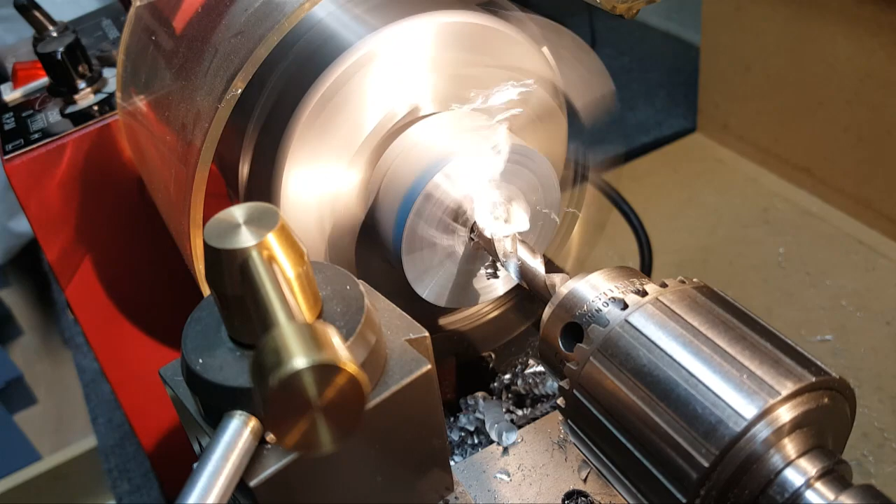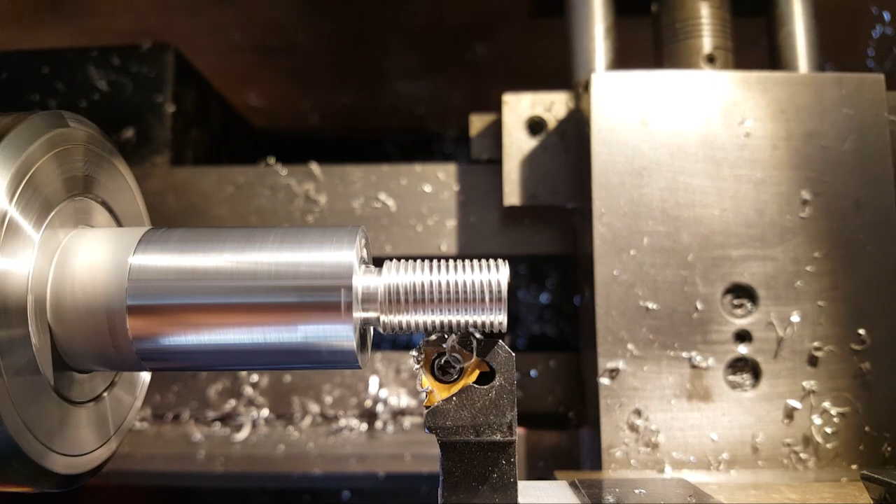I don't know what happened, but all the channels I subscribe to, the few that I subscribe to, seem like pre-July 4th nobody did anything. They were preoccupied with something. And even post-July 4th there's still no videos being produced from the channels I subscribe to. So I'm no better, I haven't done anything for 3 or 4 weeks now myself. So I decided to just do this video and share what I've been doing over the past 3 or 4 weeks.

One of the things is I've been collecting parts. I'm going to seriously enlarge the 3018, so that'll be fun. I did find a double start 500mm lead screw, and today I'm supposed to get the aluminum frame stuff, 500mm.

So what is this going to be? I guess Dave's shop talk. You know, if Tom can have a shop talk... no, Stefan does the shop talk. Okay.

So I'm just showing basically what I've been doing here, a little bit of it. And actually, if you look behind me, Suncoast Precision Tools sent me this big wall poster. I'm thinking, great, I've got no empty wall space here in the shop for it. But then I realized, perfect, steel door, put it up with magnets, it's perfect.

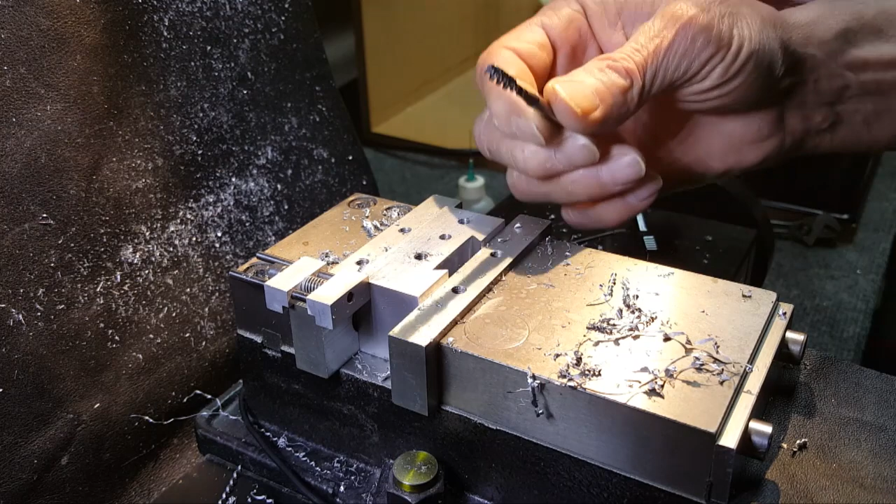Just had to record this. These are the YG1 taps I was talking about from Amazon, and I'm using Tap Magic for aluminum. But normally with a tap I have to go in, come out, go in, come out to clear the chips. These holes are a 1/2 inch deep, and I'm going to go in until I just hit bottom. There's very little force that has to be used to do this.

I know my hand's going to be swinging right in front of the camera, but it just goes in and the chips just come right out. I'm not sure how deep I am yet. Let me lower this a little bit. It just goes in. This saves me a lot of time, I cannot tell you.

There, just bottomed out, so that's a full 1/2 inch deep tap. Ow, whacked it. And they just come out in one long thread, boy. So I highly recommend these guys. I also used to have to use the taper tap first and then a bottom tap. You saw this is a bottom tap, and this is a real bottom tap. It is square to the very end, goes all the way down, and I can start the tap with it.

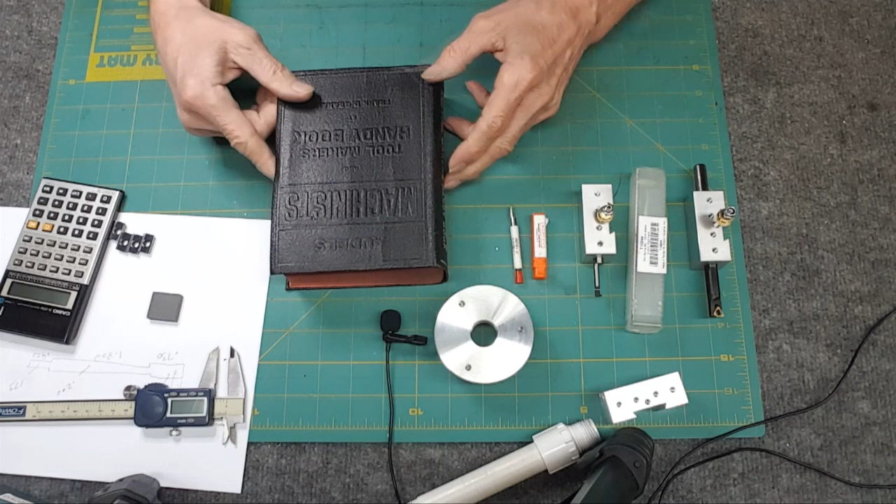First up, I'm not sure, I can't remember how I got turned on to this book, but I remember looking at it on Amazon and it was bloody expensive. There's the title of it. So I went on eBay and found this one, great condition, $40, free shipping. It was from some bookstore I guess on eBay, published in 1946.

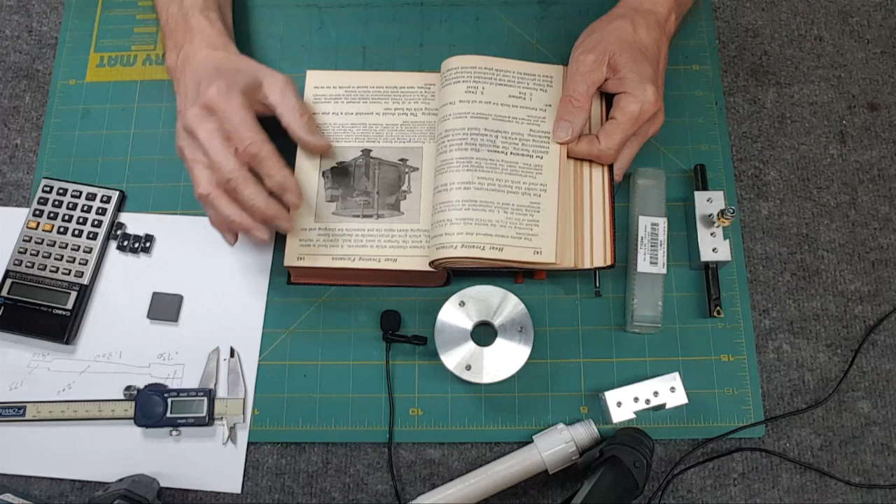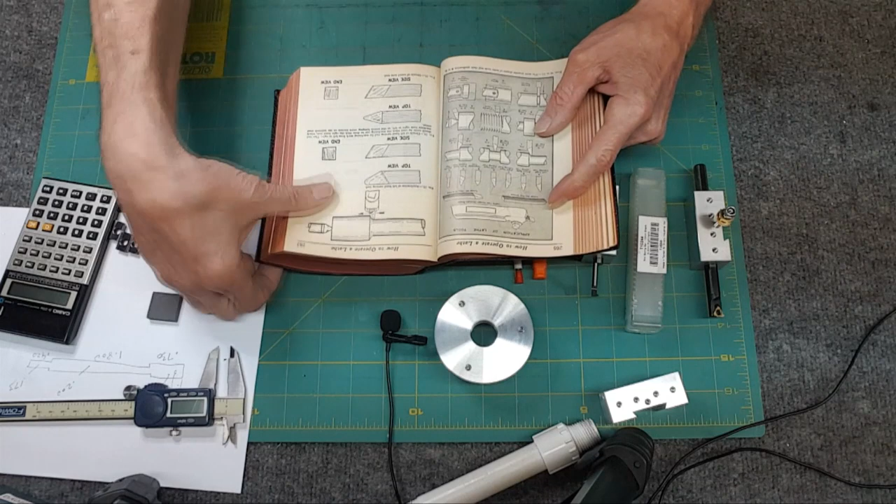But I'm not that terribly impressed with it. I did go through a lot of the pages and stuff, and a lot of it's more history for me, you know, how things were done back in 1946. They don't have a whole lot... I was hoping for ideas on projects and making tools and things, and it's not in there. It's more how to do things, cutters, how you do it on a lathe operation, and so on. Oh, that's the first time I saw a 5C collet in here.

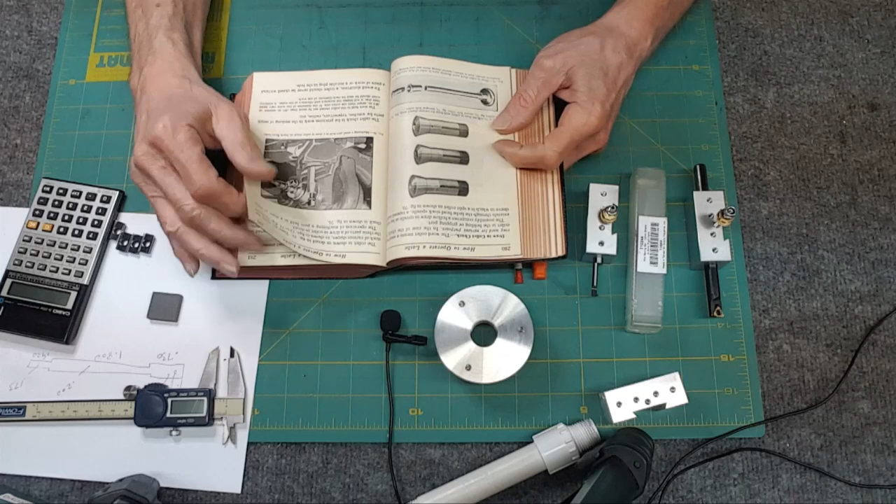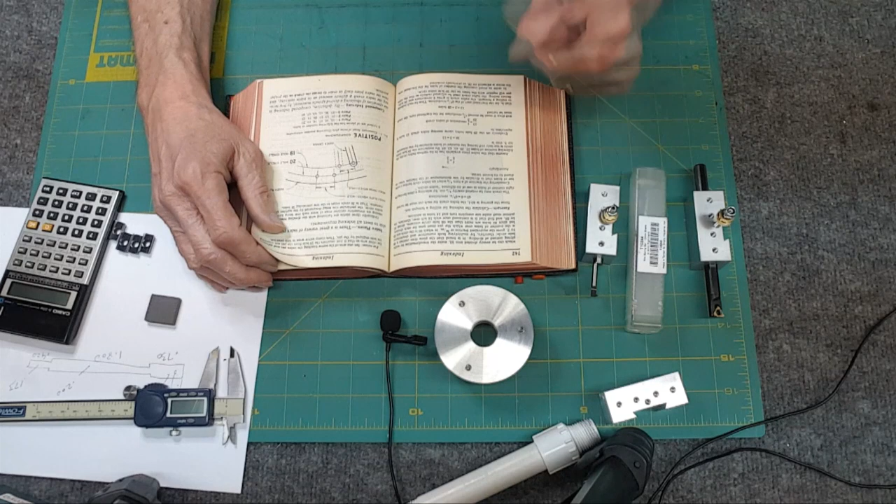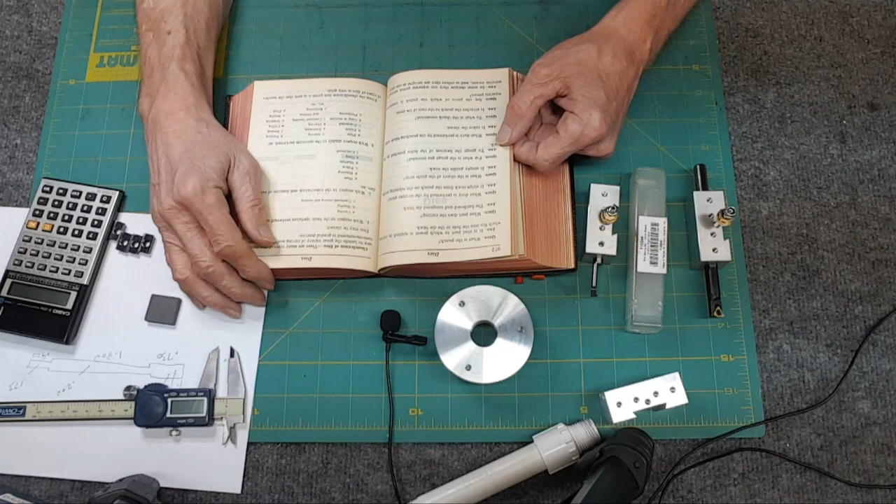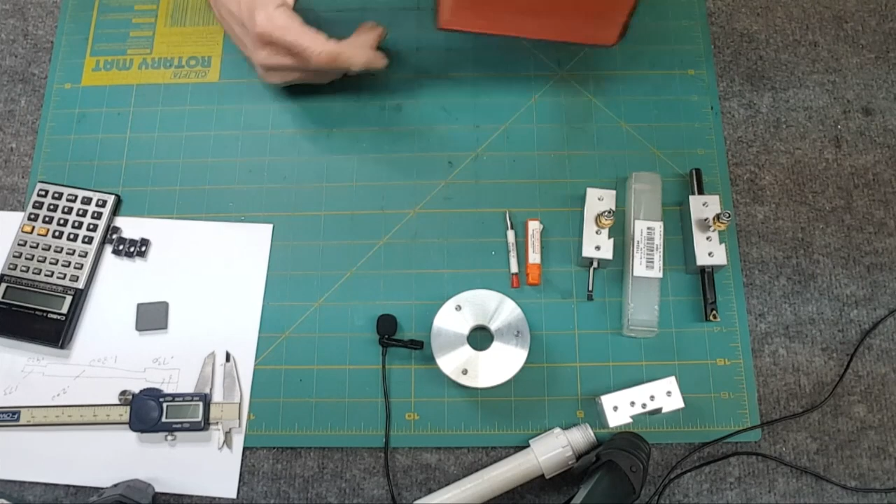I'd say that other machinist book is far more informative and useful, which I showed in a previous video. They do have question and answer sections though, which is kind of interesting, like a class book. Whoever did this, this is a lot of work to type all this stuff up. Different sections, the index is kind of weird on it. That's the first thing I wanted to share if anybody's interested in going after that.

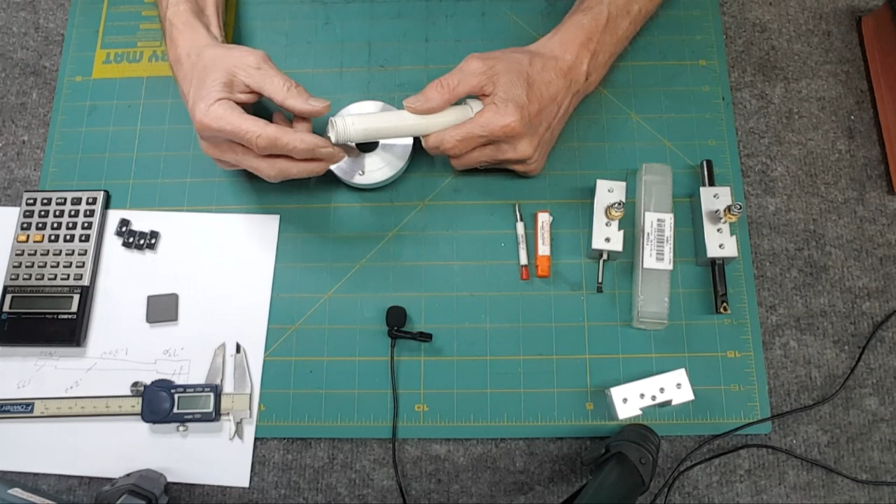Next thing, I'm trying to make a holder, a mount for a camera, and you cannot hold it on the mini lathe any which way. That's a 1/2 inch, 14 thread. Couldn't do it. I've got giant wrenches, it's slipping in the four-jaw. I tried to put it in the bench vise, no way. I couldn't even thread plastic. I had a monkey wrench on the threading die and it just kept spinning. It's ridiculous. So it kind of goes together, but I figured I don't have any internal threading tools.

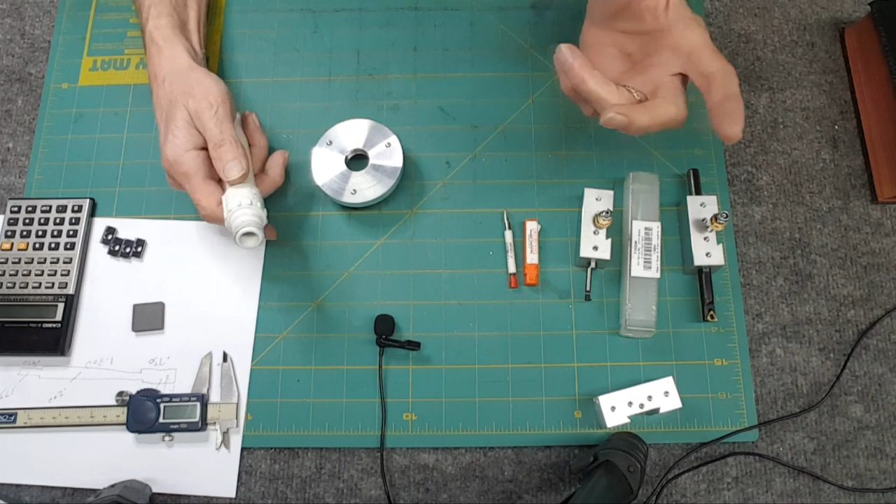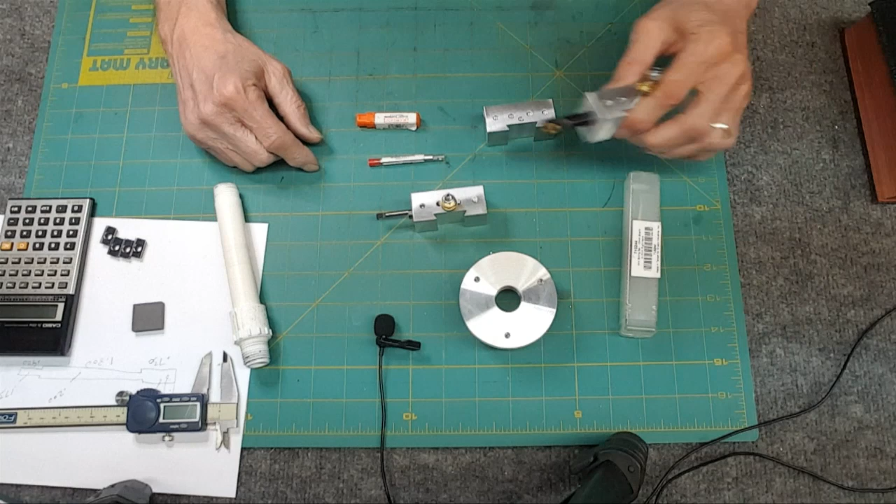So I went on eBay and found two Micro 100s. This is one of them. But I'm tired of breaking down a tool to put a new one in, redoing the height, then having to put it back together when you're done. So I started making a batch of three, which makes things really easy - you have the vise stop, put it in there, face mill, put the next one in, face mill. All of these turn out exactly the same and it's really easy.

With the DRO set up, you just cut to depth, move over, cut to depth, and so on. One of them I was going to dedicate to this, the other two were going to be something different, but I blew it on this thing because I kept banging them out and put all the holes in the center, which you can't do if you're going to put a regular cutting tool in it. I started, then realized, oh man, I blew it.

So this one's scrap, no fun. This one's done - I need to get the right size screws to finish it off though. So I have a good one, and this guy actually goes to the 14 threads per inch depth. I did have an outside one too, so I went over this again with the threading tool, doing the passes, and got it down to spec. Actually, I think I took it down further so it would sort of go in there, but now I've got the tool to do that with.

I haven't done it yet - completely forgot I had this tool in the drawer. So I wound up making this one, since I had all the holes on center, for this guy. But the curious thing is the angle - I don't know if you guys can see it, but this is the flat, and this guy is angled that way.

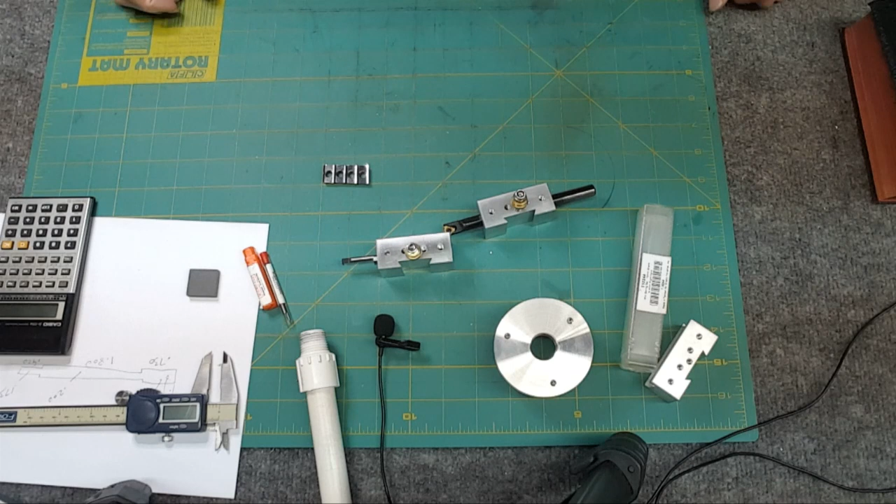So one other last curious thing, $2, eBay. It was listed as a deburring stone, for a couple bucks with free shipping. It's meant for skis, I'm guessing snow skis. So I picked it up and played with it on a few things, and I don't know how you're gonna deburr a big snow ski with this thing, but I don't know. I thought I tried it on something, but I can't remember. So that was just one other thing. If anybody wants to mess around with a teeny little deburr thing, next time I do steel or something I'll probably try it. But I always use just a regular sharpening stone.

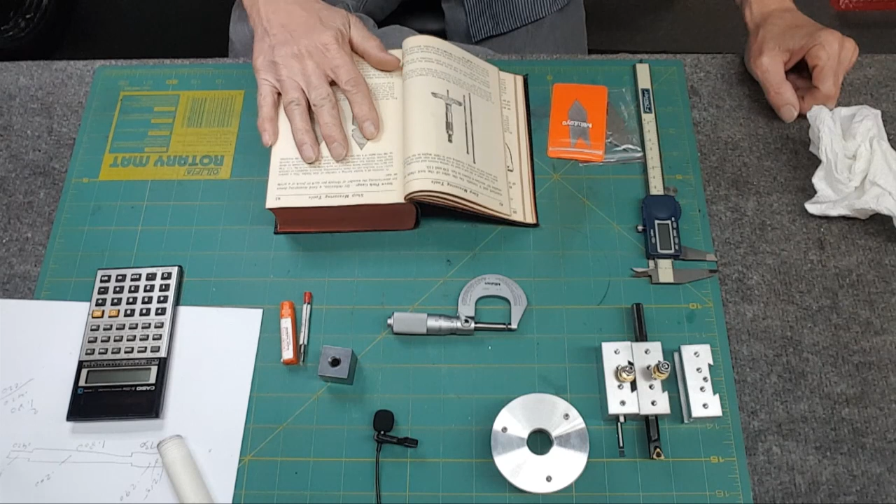So I think that's it. All I've been doing here since I did the last video weeks and weeks and weeks ago. I am finding some stuff in this book interesting. Just thumbing through it, I don't know what page it was on now, but it started making me go back to the beginning and actually start reading it from cover to cover.

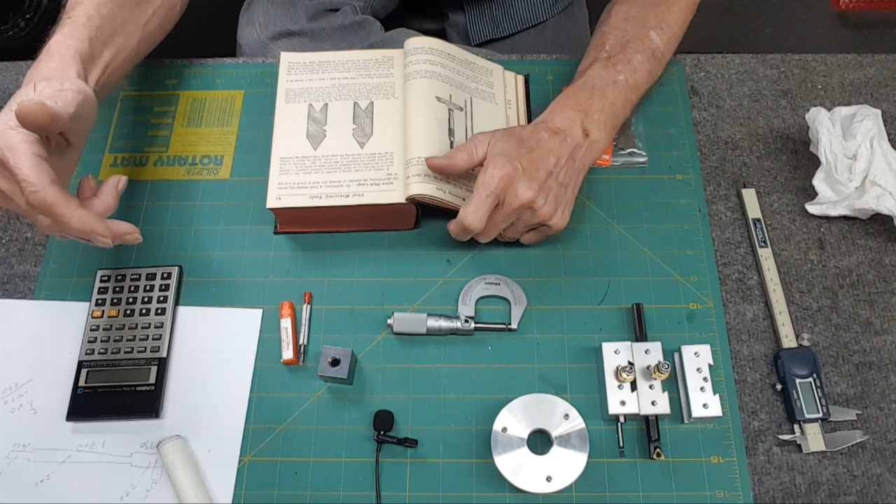Someplace back in here, they showed a precision square for a granite surface plate. It was shaped like that. It had indents in it for the fingers, so you didn't touch the edges because they were precision. I think it was a Brown and Sharpe 559 or something like that. I went on eBay just for grins and giggles, and yeah, $300, $400 for them, old, used, pre-owned, and the edges do not look too good to me when you hover over and zoom in.

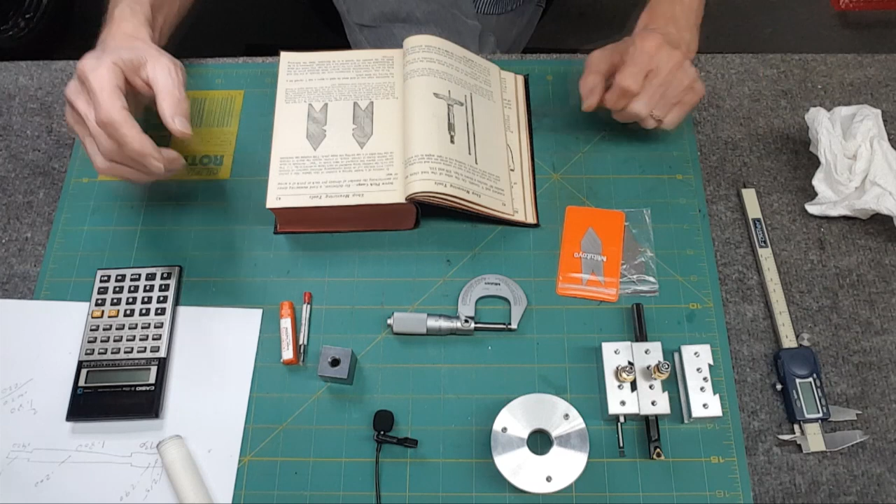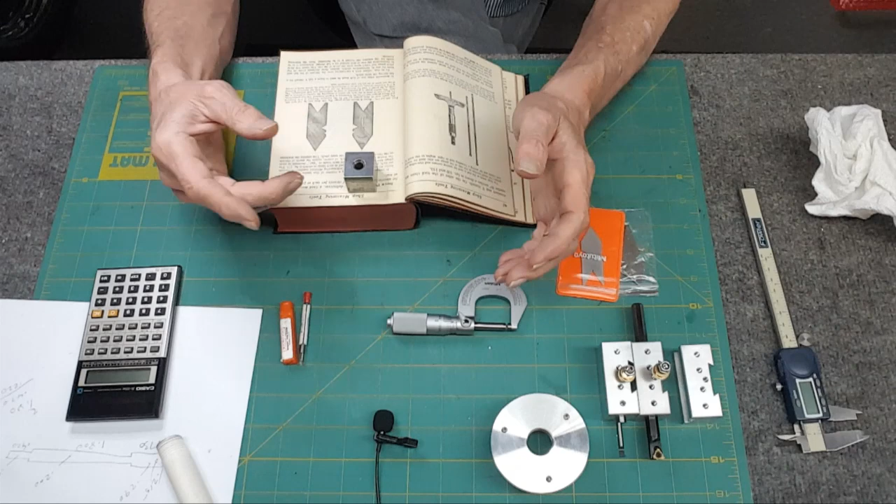For those of you who watched a previous video where I was checking all of the other squares from my square set, they're perfection. That is a perfect surface plate square, whatever thing. They sell these on Amazon. You can get a 3-inch, 4-inch, $10, $20. So I realized, I've got a whole set of precision absolute square stuff.

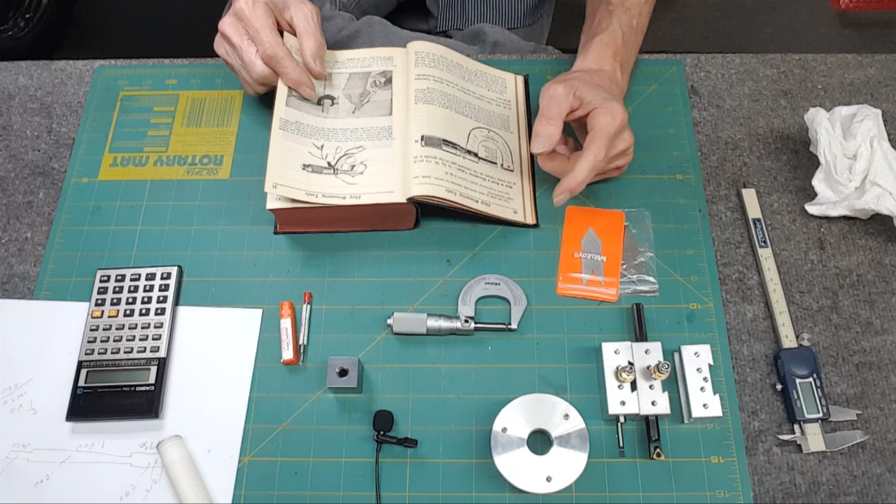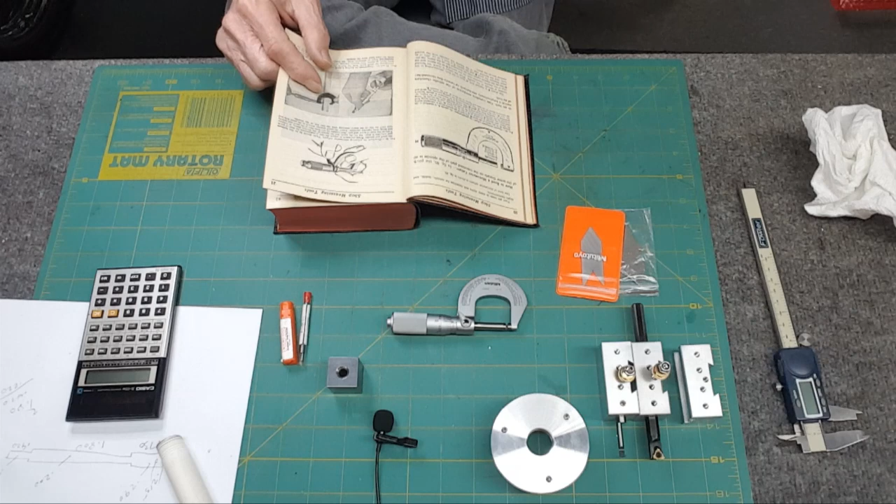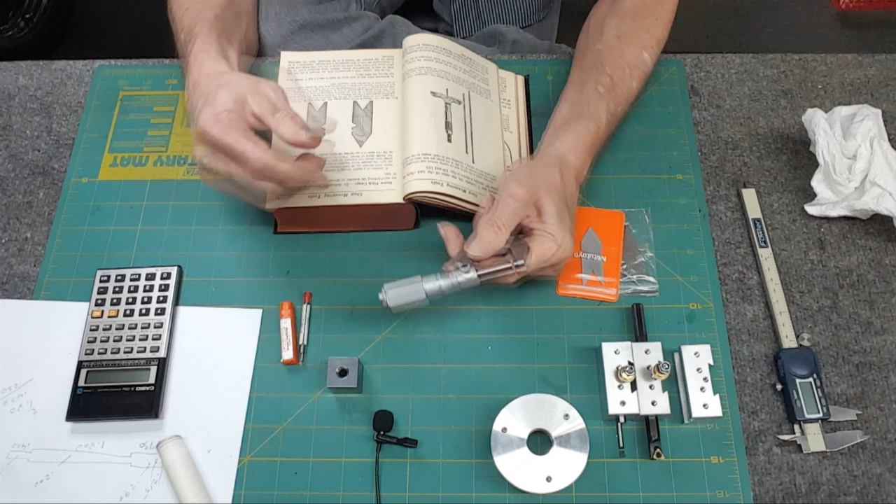The other thing was back in here. Yeah, they do call it a micrometer caliper, technically. So everybody's shortened it and they call it a micrometer or a mic. But the other machining fundamentals book also, I learned, it's called a micrometer caliper. But they talk about the hole, and I was always thinking the little calibration hole here, that yeah, you spin it on a friction fit for the first time to calibrate it. They're saying no, it's to compensate for wear in the nut and the lead screw. So if you have a very old mic, you may want to double check its calibration.

Mine, yeah, when you buy something this expensive and it's supposed to measure tenths, mine is zero, lands right on the money. So I thought that was interesting to learn, that these things wear out. I mean, really?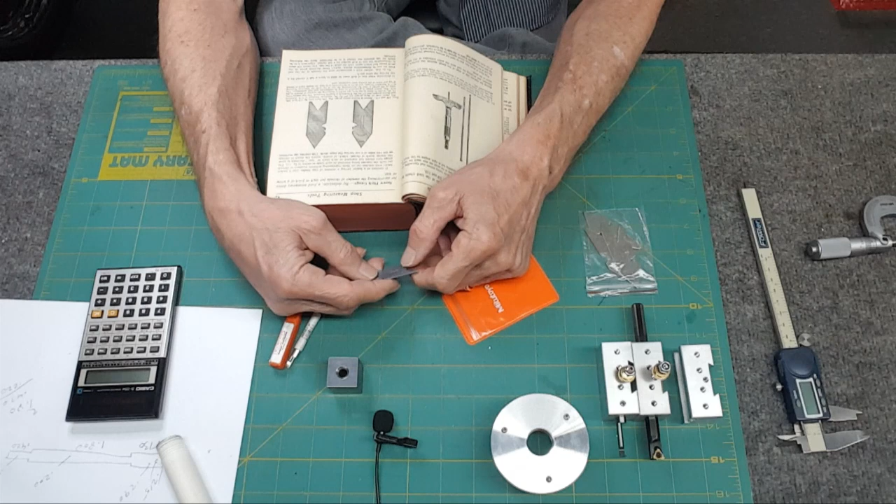32, 24, 14, and 20 threads per inch. So you can actually hold this - this is a 12, and when I held it up, it lines right up. So it's not only for making your tools, you can kind of use this as a cheap thread gauge, a quick one, rather than buying the thread gauge set.

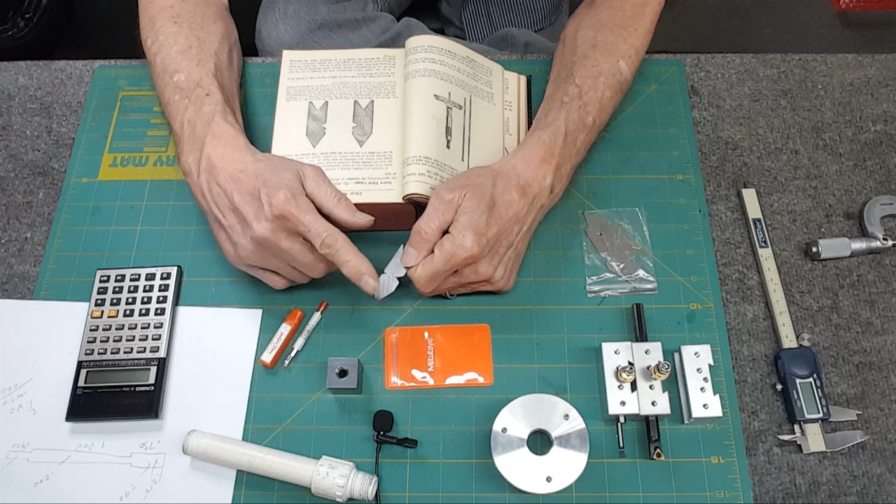But the thread gauge set gives you every one that there is. The real interesting thing is the table on this. They don't go very far though - I think it was like 28 threads per inch is the highest they go. I need to find a table that goes all the way up.

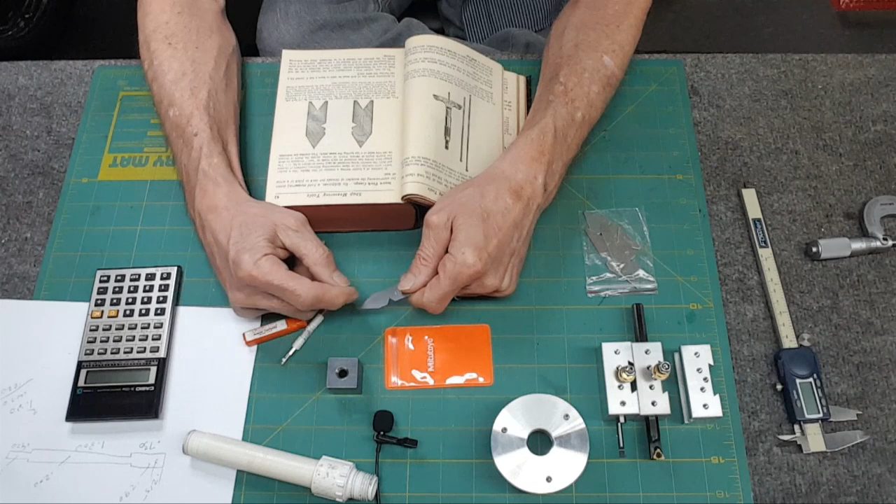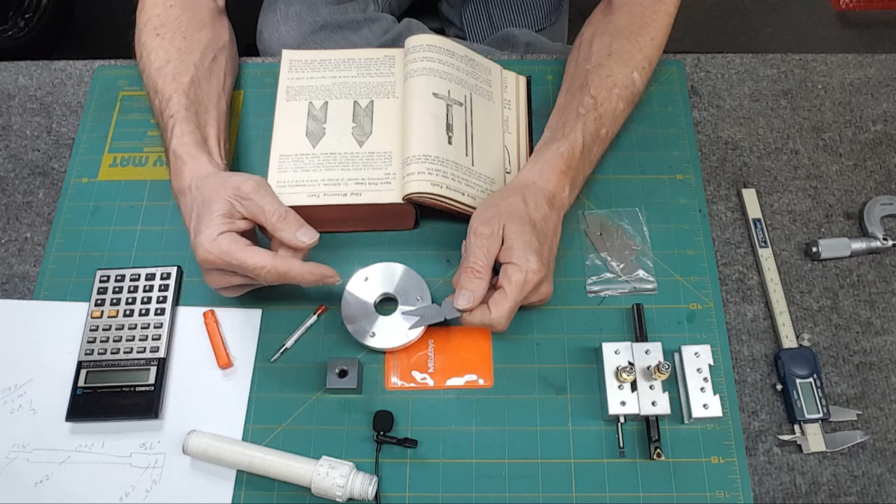These numbers are, for instance, if you wanted to do 12 threads per inch, there's a double depth number here. What that means by double depth is the depth of this side plus the depth of this side. So if you want a perfect V thread, you take the diameter - like if we're going to do a 3/8, you take 3/8 minus the double depth. That's the drill bit you use to get a perfect V. I did check it on a 3/8 24, and sure enough, what they recommend is oversized by quite a few thousandths.

Like I said, I want to find a table that goes up to like 32, because I got 632, 832, 1032s, and I'm doing that a lot. When you put the screw in there, it's kind of sloppy and rocks. So it'd be fun to actually drill a hole and tap it where I'm going to get a full thread and see what it's like.

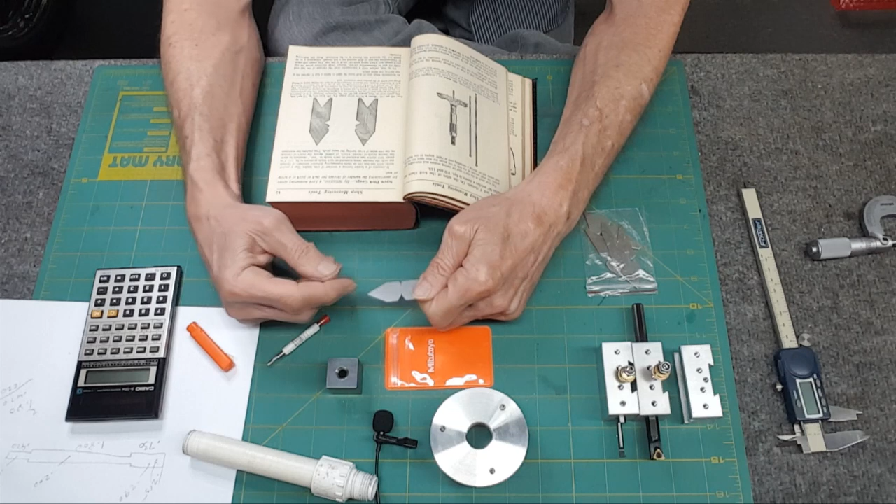Because with it oversized, you're missing the peak of the V - you're drilling the hole bigger, so you're getting the depth but you're missing the point on it. I should look at some thread. All the threads I remember looking at seem like they always have a point to them. So I don't know - I'm going to just keep going through this book because this is interesting to pick up some of this stuff.

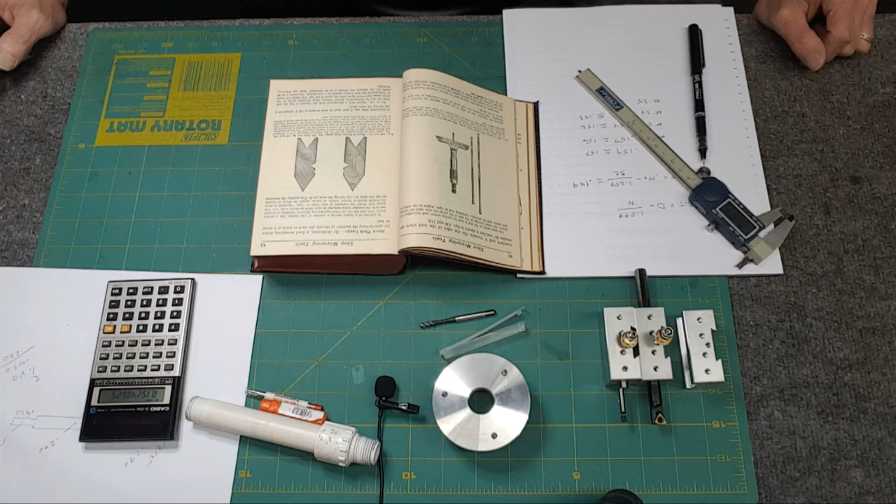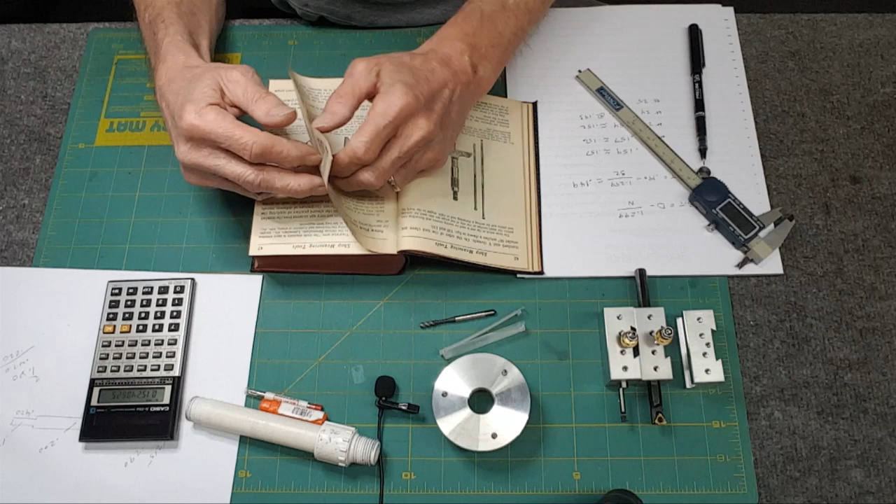I'm saying, you know, I got to find the chart for all of these. You turn the page... oh come on, alright there we go. Jeez, these are thin pages. There, finally - there's the formula. I guess I'll turn it over so you guys can see it.

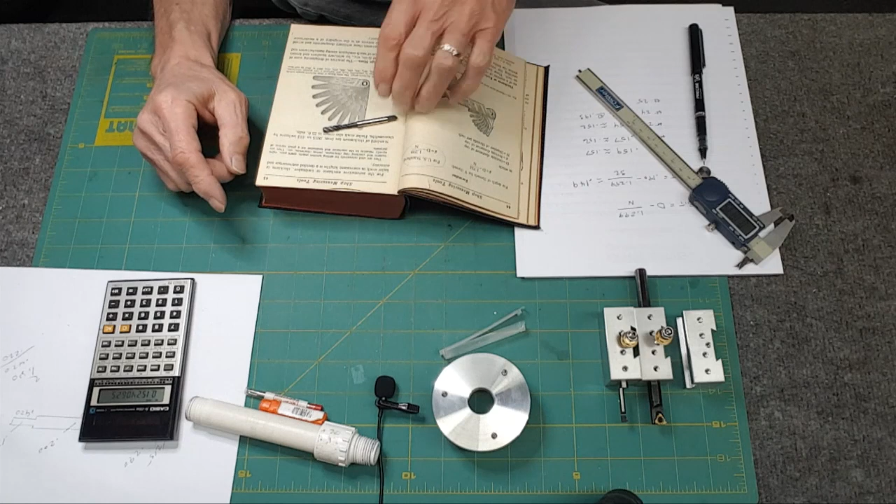They say the diameter of the tap here for D. So luckily with the YG1s, I can measure the outside diameter of the tap. 3 points, you're not going to get there exactly. So I did put the caliper on it, and I'm getting anything from 190 thou to 193 for a 1032 tap.

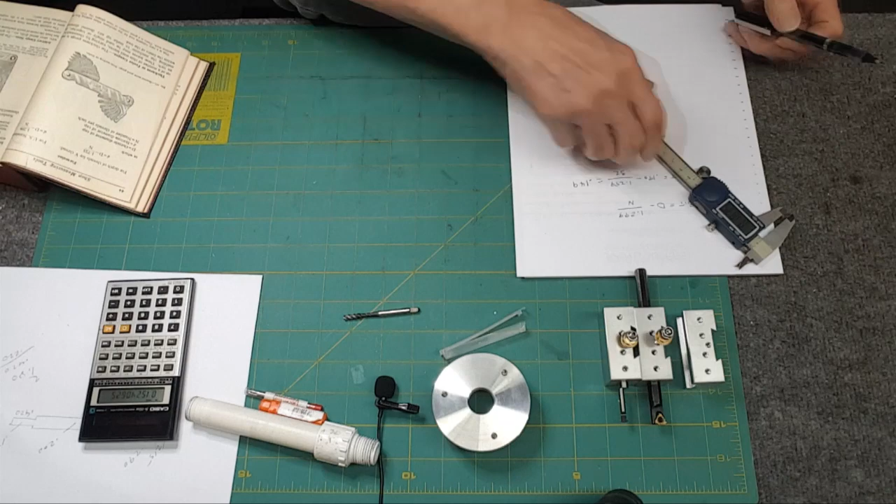So I've done some math here already. Let me get it over there in the camera view. I don't know if you guys can read it, but there's their formula. And I punched in 0.190, the minimum that I was getting. And it says it should be a 149 thousandths drill bit to get a perfect V cut.

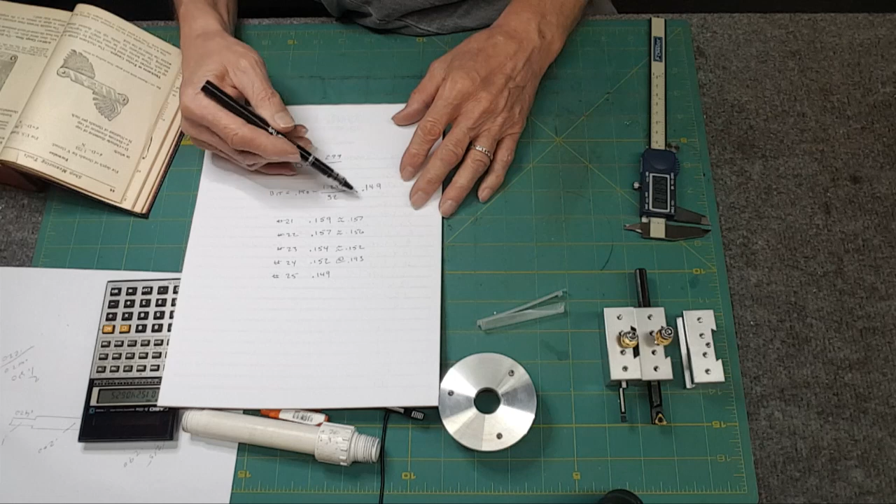Now the chart for all these, for a 1032, says you use a number 21 bit, which is 159 - 10 thousandths bigger. 22 is 157, and so on down. The drill bits are actually undersized, so that's what all these numbers are - a 159 bit actually measures 157. So I'm thinking, let's do some drilling here and tapping and do some experiments and see how it comes out.

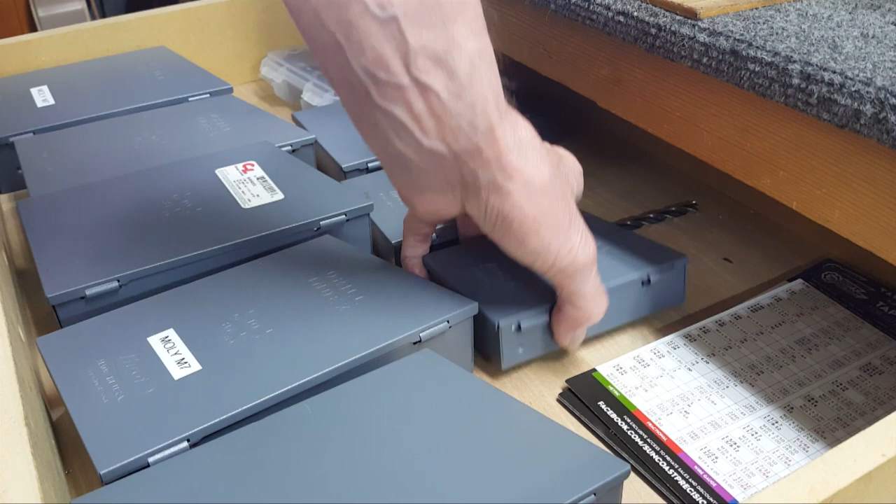Alright, I'm going to use the Drill Hog Molys because they're split point, and I think that'll give me a better hole, a more accurate hole.

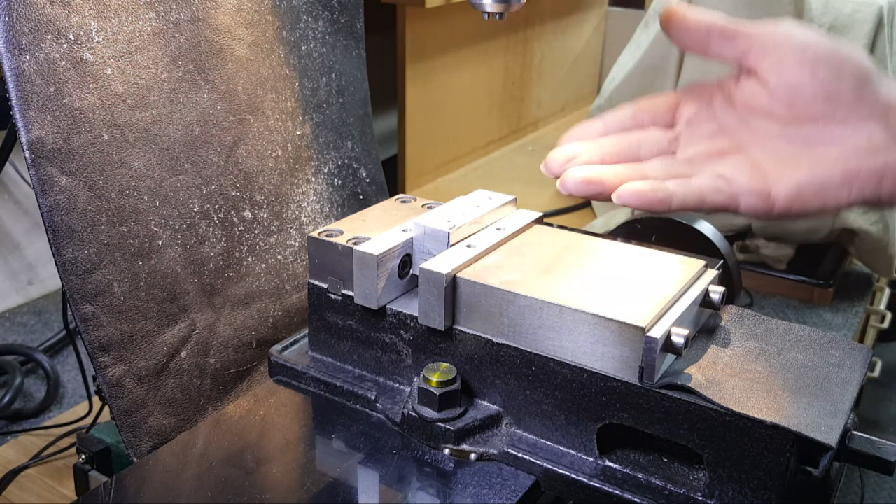Alright, so I've got it marked out just to make sure I can make it on this junk piece of aluminum - every half inch a hole. DRO is up and running, zero it out. Alright, so the first drill bit I need out of this set - I guess I'm going to do the largest hole first, so that's a 21 bit, right? Yeah, there's the 21. Right, 21 bit. Alright, get him in there.

And chuck key. So I need to line it up. Oh, everything's locked. Line it up on the first one to drill, right? Actually, let me drill it further away so I can mark what this is.

Marker. Okay, so this is the 21. Boy, that's hard to write. 210 at the DRO, so I know where I'm going. Alright, ready to go. Let's drill.

I'm not sure how far down. I gotta re-zero it again. I'll go down a half inch. Alright. I'm Chip City, huh? Yeah, hold my hand here. Sorry about that, folks. Alright, 100.

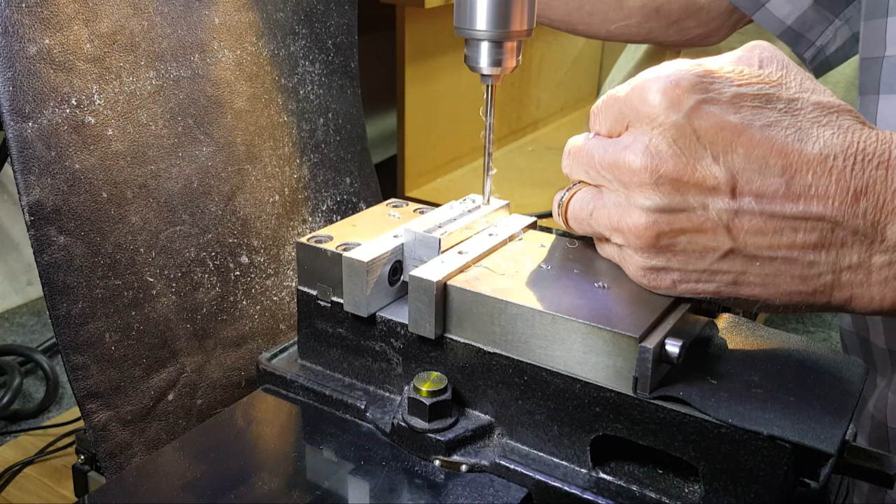200. No, almost 200, now 200. And 300. I'm just probably going to just do the rest of this off camera. That's 400 right there. 450. Yeah, half inch. Alright, I'm going to do the rest of these holes off camera.

Alright, set for tapping. All the holes are deburred or drilled, and I was just deburring the last hole just for fun to see what happens. So 24 should be the smallest hole, 21 the biggest hole. So I got my tap here, and I know my hand's going to be in the way again.

But we're going to do all of, oh, I'm on the last hole. So this is the smallest hole, right? Yeah, I get it, yeah. So how's it going to work? It feels fine. Yeah, it's not too bad. It's about as, maybe just a tad stiffer or harder than normal.

And then we'll try the, I think that's the bottom. I'm not sure. I don't want to break this tap off in there. I don't know what to say. Then we'll just try a screw in there and see what it's like.

Put more magic juice on there. And we'll take this one in. So, I guess I'll do the rest off camera. And bring you back when they're done.

Blown out. Oh, this is stiff. Oh, that's pretty tight, for some reason. Yeah, that is pretty tight. Maybe I didn't put enough stuff on it. Boy, that's real tight. I don't like that.

Next time I'll make sure I blow this thing off and then... Wow. Blow it off, make sure I put a bunch of juice on it. There, it's cleaned up. I guess move this over for the next hole.